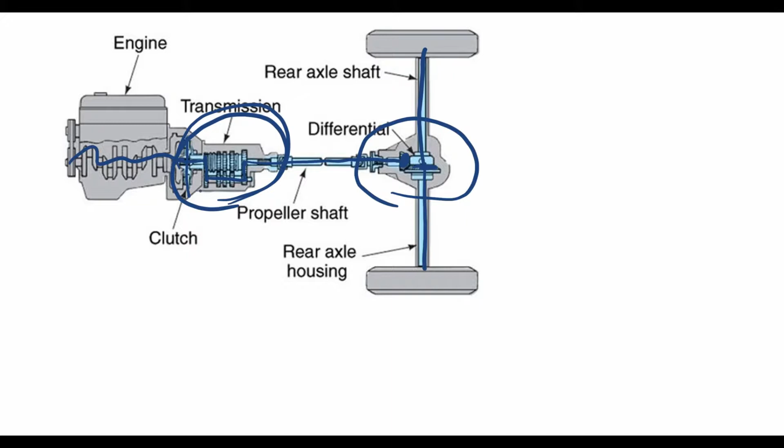And so we have a chance to play with the gears in here. This gear ratio is set already. These can vary and you can change them in a manual transmission to do whatever you need them to do for the situation you're in. So let's look at some gear ratios right now and see if we can calculate a gear ratio.

So we have two gears here. We have one gear that is a larger gear with a lot more teeth and one with less teeth. And we're going to assume that this one with less teeth is our drive gear. In other words, if we look back at our picture here, this would be this input shaft gear that sits right there, and it's driving or turning all of the other gears. So this is the drive gear, and this one up here is the driven gear. In other words, it's being turned by something else.

The way to figure out a gear ratio is to take the driven gear and divide it by the drive gear. In other words, we would count the number of teeth all the way around on this gear and write it on top, and then we would take the number of teeth here and put them on the bottom. And this is going to be our gear ratio.

And that gear ratio tells us how many times the drive gear needs to turn to turn the driven gear one time. And so we're going to figure it out and put a number in here to 1. So let's put some numbers in there.

Just get rid of my lines here. So let's say that this gear has 40 teeth and this gear has 20 teeth. So we put it into our formula, we get 40 on the driven gear divided by 20 on the drive gear, and that equals, let's get our calculator, 40 divided by 20 equals 2.

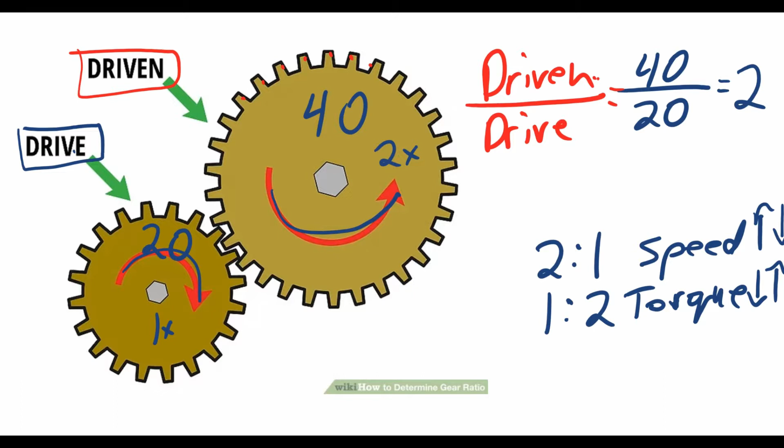So you can see that our speed and our torque vary with one another. As the speed goes up, the torque goes down. As the torque goes up, the speed goes down. You can't have both. You can only have one. And so that's the beauty of a manual transmission. Now, in a manual transmission, it's not all quite like that. It gets a little bit more complicated.

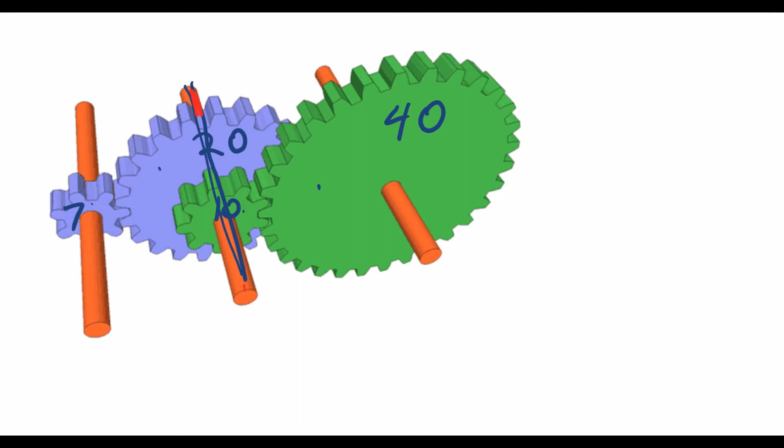The formula is driven over drive for one set of gear ratios. You take that answer and you multiply it by driven over drive. And if you have lots, you could have 3 or 4 or 10 or 100. You just keep multiplying them on to the end.

So let's calculate this one. We've got 7 and 20. So I want to go 20 on the driven divided by 7. And that's going to be multiplied by 40 over 10. But we have to figure out the gear ratio first. So let's get our calculator, and we're going to go 20 divided by 7 equals 2.857. I'm just going to slide this up here. 2.857 times 40 divided by 10 equals 4.

Now what I'm going to do is I'm going to change this a little bit. We always make it to 2 decimals. That's the way they do it for some reason, but we're going to do it that way too. And this is 4.00. So we multiply those two together, and we've got 4 times 2.86 equals 11.44.

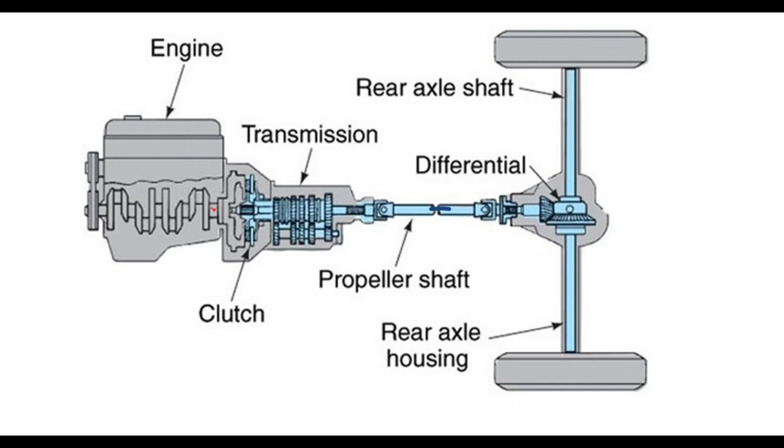So we're going to head out of our crankshaft into our input gear. That goes over to this gear. So that's a gear ratio right there. Driven over drive. And this gear is attached directly to this one over here, and it drives this gear. So that is driven over drive.

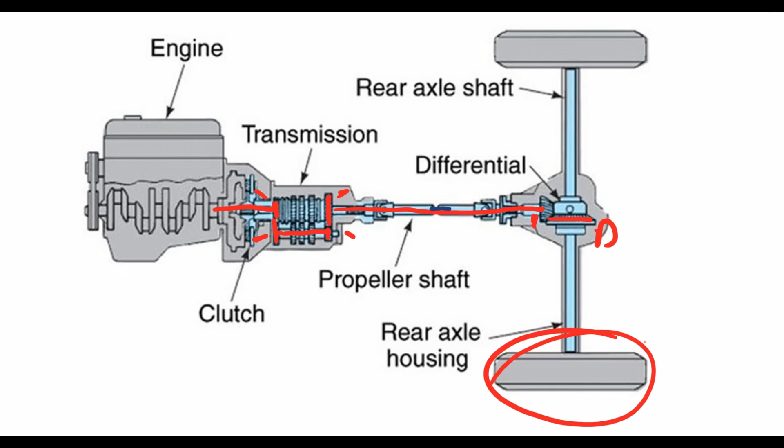And that gets transferred all the way through to my pinion gear, to my crown gear. This is the driven, and this is the drive. So if we calculate those all together, we're going to end up with our final drive for the number of rotations of our wheels as compared to the number of rotations of our crankshaft.